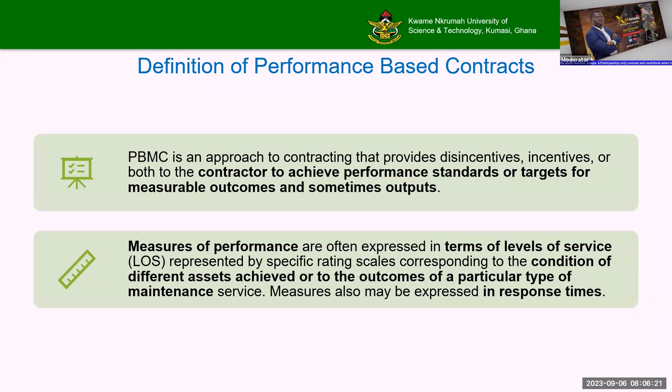Then we also talk about measures of performance, where we define levels of service. And here we define it sometimes in terms of condition of the assets achieved, outcomes achieved on a particular type of maintenance, and the response times. Then I talked about design, build, maintain, operate, and transfer, but it could be design, build, and transfer, or any variation of it, depending on what the client wants, the maturity of the industry for maintenance and design, and also the value of the contract. Because long-term commitment of government, for 10 years, 12 years, can be problematic in Africa. So there are variations of the same. The intent is still the same.

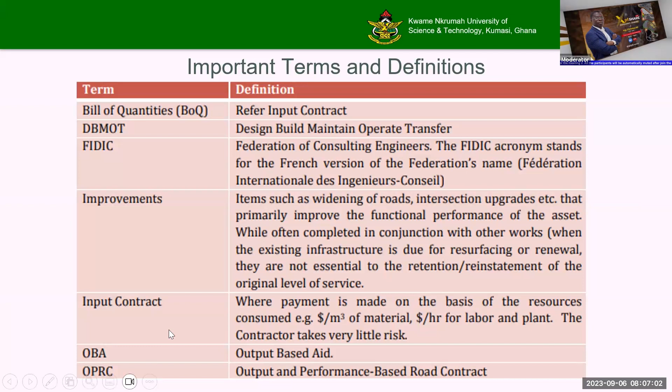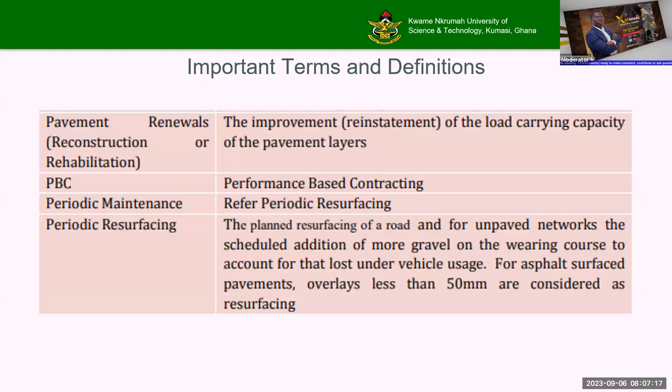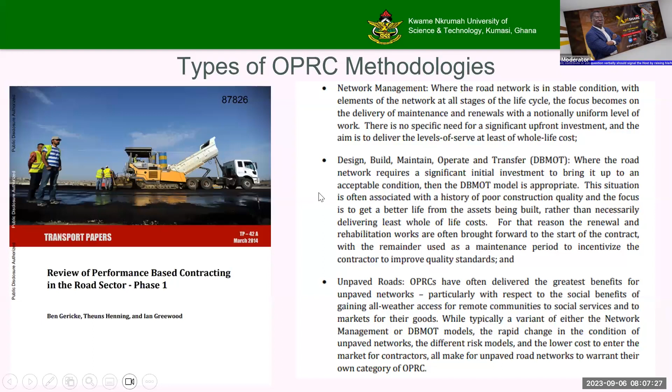And then we talk about pavement renewal, reconstruction, rehabilitation. This is a term that you see almost everywhere. And then we talk about periodic maintenance, just as we know, and routine maintenance is the same as we know. Then, particularly, we talk about this reference material, which you can download online. So we talk about network management. If the network is in a stable condition and you want to give out a section of the network, say over 200 kilometers, as you are seeing with the feeder roads, paved and gravel roads, then the contracting entity does some design or rehabilitation, and then also maintains it for some time.

Then we talked about design-build options, where you design, you build, sometimes you maintain, operate, and transfer. Or you design, you build, you do a little bit of maintenance and you transfer without operating. And then we have unpaved, which is when you have special category as well.

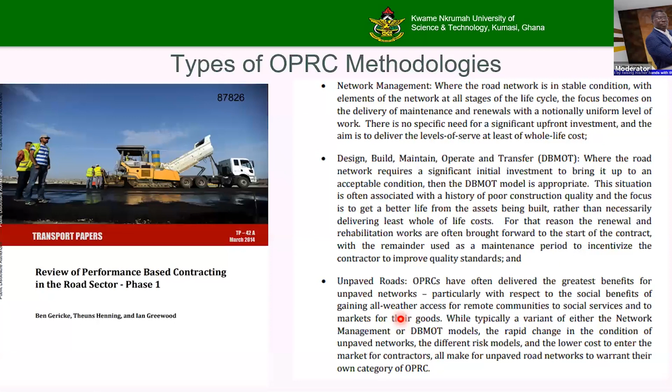Then I also mentioned this one, which is very important, that between traditional contracts and OPRC, you will see that here we were only interested in efficiency, meeting our BOQ, but that is not a very efficient contract. So we are moving towards output-based contracts and then performance-based, where now the community outcomes are also very important. And that is the way we can prove whether we are meeting the sustainable goals, because we want people to enjoy the network, using the road user satisfaction.

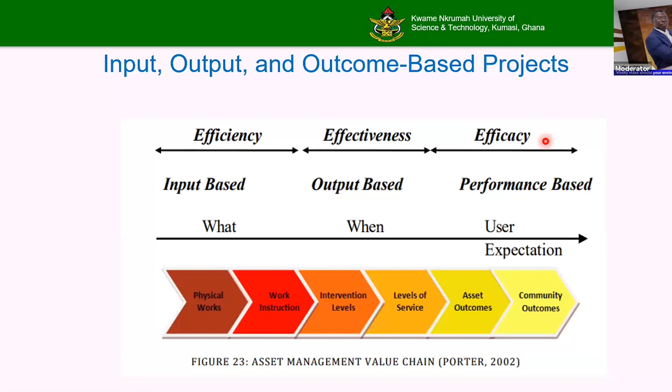Then let's see now from today's perspective. We are talking about two countries. One has 32 million people, and per capita GDP is, no, I think it's the GDP. Sorry, I wanted to put it per capita. No problem. So it's GDP, not per capita GDP. So GDP is about 77 billion USD.

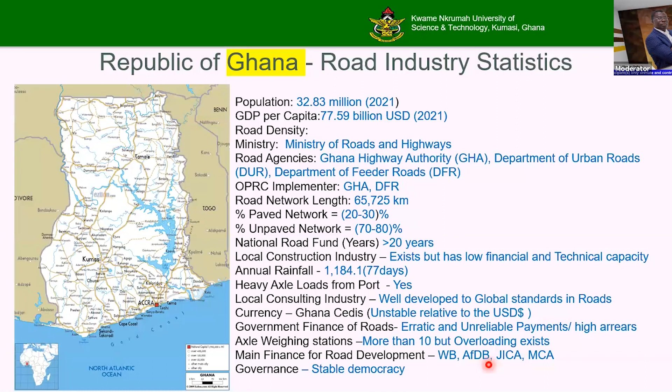Then talk about the government finance of roads, erratic, unreliable. Axle weighing stations exist, but there is reported overloading. Okay, I think I'm not doing badly.

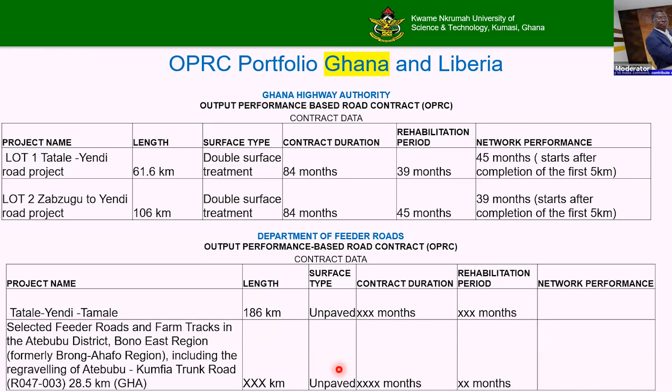You see that this is typically the second one that I showed you for the feeder road. This is how it looks. The roads that are under consideration, and the length, and the total length is about 214 kilometers. So you see that Ghana has a little bit more roads that are doing OPRC to learn. And I would say it's learning because these have just been started and they are yet to learn the lessons so that we can adjust future OPRCs. That's very important for this kind of work.

Now, Liberia. At the Ministry of Public Works, there is no road agency; OPRC is being implemented by the unit where I work, the Infrastructure Implementation Unit of the Ministry of Public Works. Everybody there works on contract and is financed by the World Bank. So the network is not as much as Ghana. The population itself is very small, a little over 5 million. Then we have a small paved network and a lot of unpaved roads. But we have a lot of concrete roads in our cities. Our road fund is less than 5 years old, so it's very young. And there is virtually no local construction industry to maintain the road network.

Annual rainfall, the least is twice what you find in Ghana. So a large part of the year, you can't do any works. Free ports that have a lot of heavy axle loads going towards Guinea and other landlocked countries. Then the local industry is not developed.

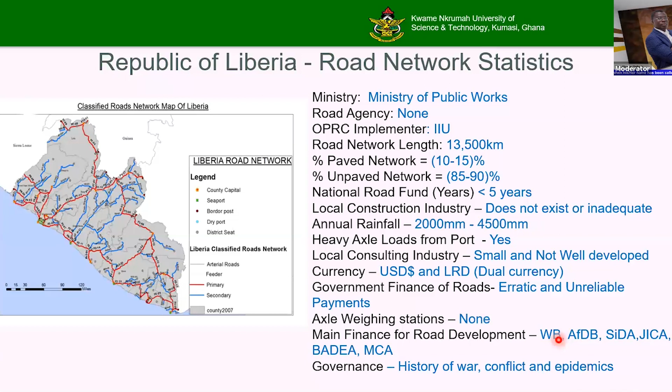So, why are these countries doing OPRC? Before I talk to you about the standard, countries have a large percentage of unpaved roads, and the condition of the roads is not good, or they are not able to finance maintenance continuously. So you see that the network is having challenges and it is not resilient. So if you want the road user to have a very good riding surface and riding comfort, then the potential to drive the service level high will come through OPRC.

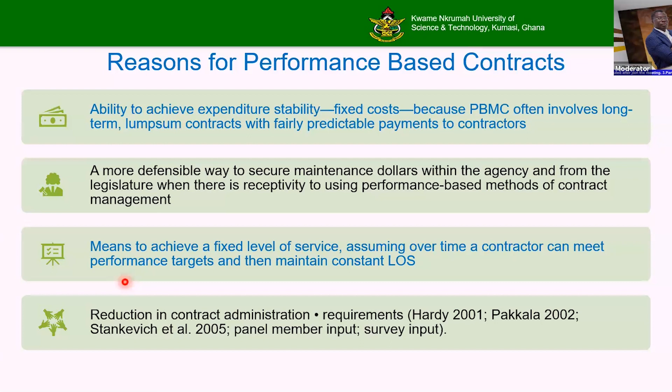And then we want to shift risk to contractors where we can, because sometimes it's a business risk and therefore government or employer should not carry it. And we want to realize the benefits of partnering between contracting entity and client for better results. The ability of the contractor and contracting entity to minimize life cycle cost through innovation is also there. And of course, we want innovation, innovation, innovation.

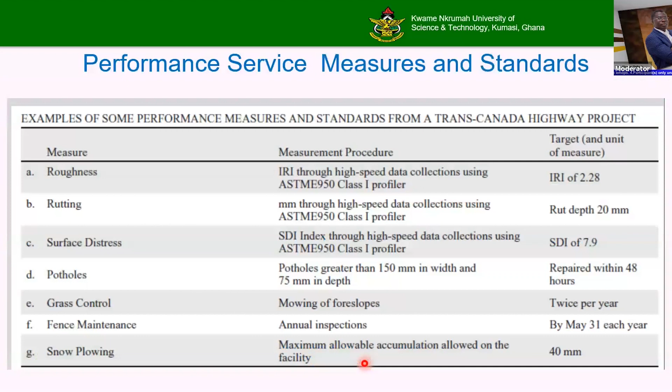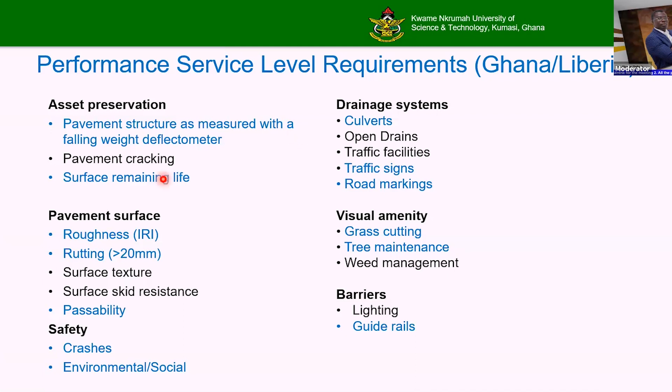Now, I also mentioned that payments are done based on service level, so that is why the monitoring consultant is there. And the service level can be defined usually in terms of usability of the road, the surface conditions, safety, roadside assistance, and so many other things.

Now, let me say that, for example, the new roads that we are about to let out, what we have decided to do, and of course, we do that for the other ones as well. As soon as the contractor goes to site, he's supposed to make sure that the road is passable throughout the contract. So before he does any design, he needs to maintain the road, and the corridor is a very, very bad corridor. People get stuck, trucks get stuck, large cargo gets stuck.

So one of the reasons why it is there is to make sure that as soon as he signs the contract and mobilizes to the site, they're going to check how he manages to make sure that nobody gets stuck. So if you have 6 months to finish the design, he will be still maintaining the road for people to get the benefits. Whereas in the other case, you have to wait for the road to finish. This time around, he doesn't have to finish the road before the benefit.

Now, in terms of payment, this is a typical example. He gets 20% mobilization, and then gets paid as he does 5-kilometer intervals like that. So every 5 kilometers, the work can be assessed and paid for. A certain amount is paid.

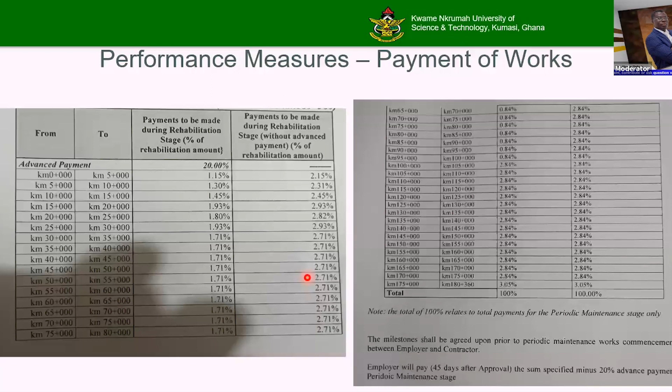Now, in terms of management, I got this from one of our contracts, and you see that when the contractor puts in an inspection report, there is a service level that he has to meet, and then you check it, and then there is action taken. So everything is guided, and he needs to meet every one of these requirements. Otherwise, he can get penalized.

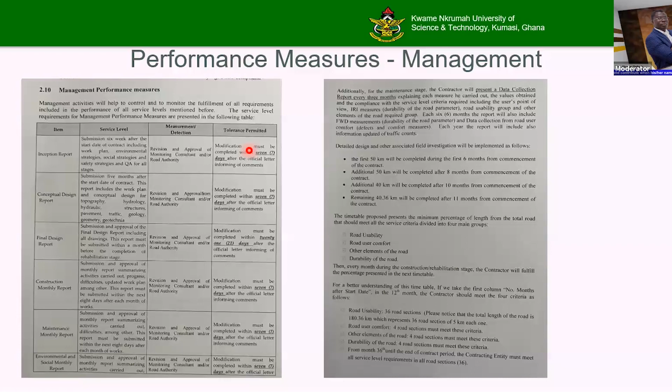Now, we say that for all our projects here, we do feasibility. The feasibility will help you to define your requirements very well. If you don't do feasibility, you leave everything to chance. And you are likely to have problems in the initial teething stages of the contract because this whole thing is a learning for everybody, both consultants, employer, contractor, and contracting entity. So when you do a good feasibility, then he just does a review of it, and then the work can progress very fast.

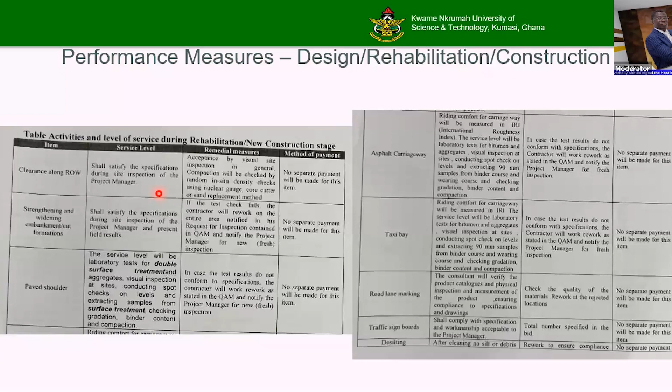Now, typical maintenance measures for service level for maintenance. You see that the contractor is supposed to do a certain amount of work, and then part of it will be assessed. And when we assess it, we regard it as fair, good, very good, or excellent. On the basis of that, if the percentage that is stated in the contract is fulfilled, then he gets paid. Otherwise, he needs to do something about it.

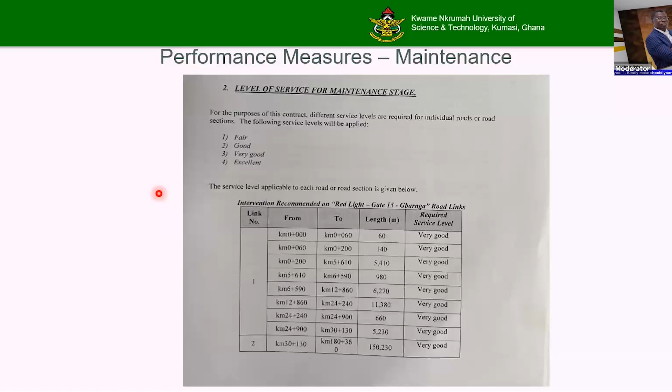So that's why I said that in this case, we are doing more of the technical asset management, not the traditional measurement stuff. Even though we measure, we know that when you do a certain quantity of work, you will get paid a certain amount of money. So our focus is the output and the outcome. What are we getting? And what is the job of the monitoring consultant? And of course, the client.

And the client plays a quality assurance role because the monitoring consultant sometimes just behaves like a letterbox. When he gets a claim from the contractor, he just passes it on without reading the contract. That should not be the case.

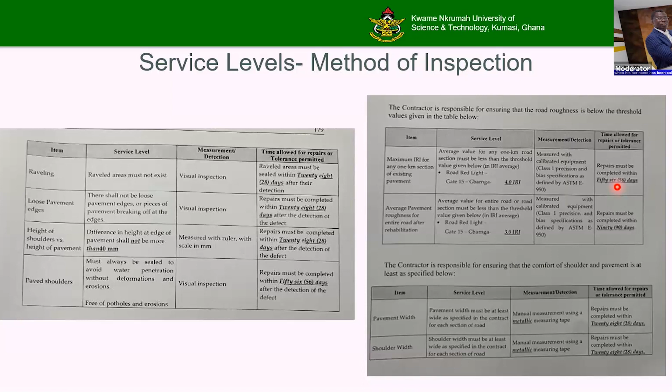I mean, durability, we check things like deflection, we check FWD every 50 meters, all that is done. Now, all this will be done probably during the maintenance phase. Then, at the end of it, for our first contract, the contractor was supposed to do an overlay. So you would do an FWD, determine the remaining life of each section, and then do that calculation and then tell us which sections have to be overlaid with what, so that the roads can last 20 years.

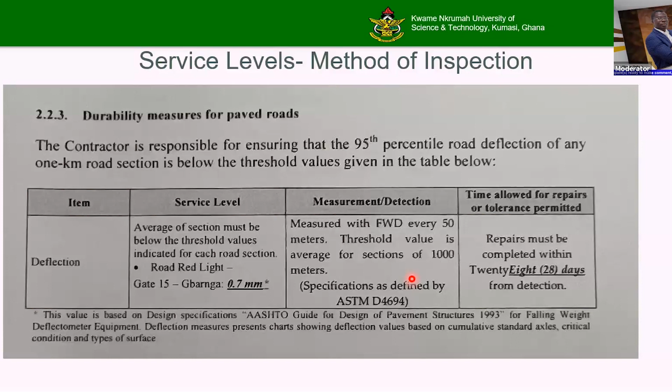And here we are designing to last for 20 years. So far, our first project is more than 10 years old, no pothole all the way, about 175 kilometers, no pothole. It's working beautifully. My time is going, so I need to go fast because I want to show you something on Ghana as well. All this is Liberia information.

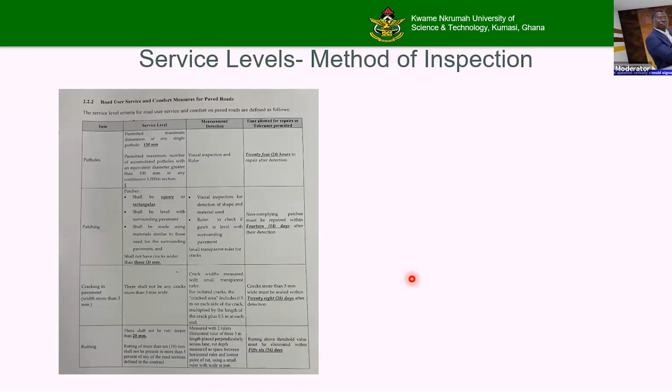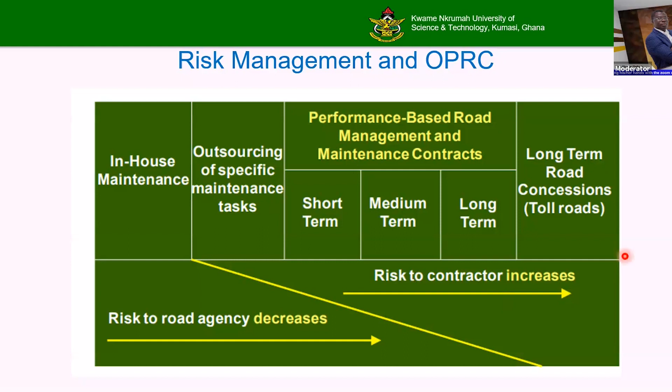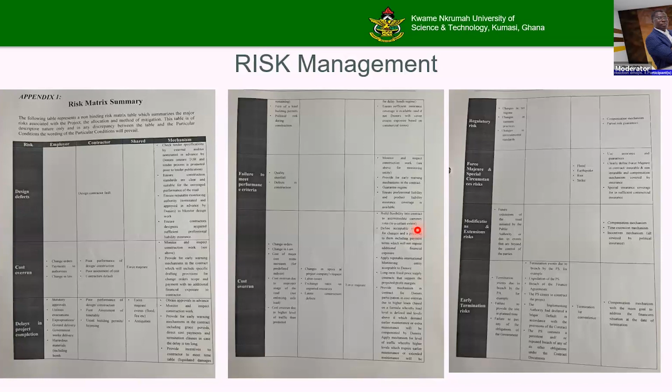So I try to do a bit of comparison based on the understanding of countries, and where I think they are doing OPRC. So, for example, in Ghana, it is reported frequently that roads don't last. Frequent payments, we build them, they don't last. Contractors are doing shoddy jobs. Here, the road didn't exist. And so there's nothing like a shoddy job. The road didn't exist. And government spent a lot of money from donors. And the donors want them to build the network. And therefore, let's look at maturity of the network in terms of ability to handle changes in assets.

And I think of both countries, Ghana did well in the past. In recent times, you see the road fund is down. It's not able to pay for a lot of things. It's doing a lot of construction, but maintenance-wise, it's very low. So it's not too different from Liberia. Knowledge of OPRC, I'll say that is very low, because when I started teaching OPRC to master's students in tech a couple of years ago, these things were not discussed. So I say it is low. So they know about road network development, but not about OPRC and the technicalities. And therefore, more has to be learned.

Then here, the knowledge was low. But as you can see, with the support of the World Bank, we are getting all the knowledge in, and we are also advancing forward. So there's a lot happening here. And therefore, I'll say that the implementation support from the bank, through consultants and the bank itself, is very good. History of asset management: I would say Ghana is fair, above Liberia, which is poor. Then traffic control and overloading: this one doesn't have weighbridges. This one has weighbridges, but even the Minister of Roads and Highways says it's not working.